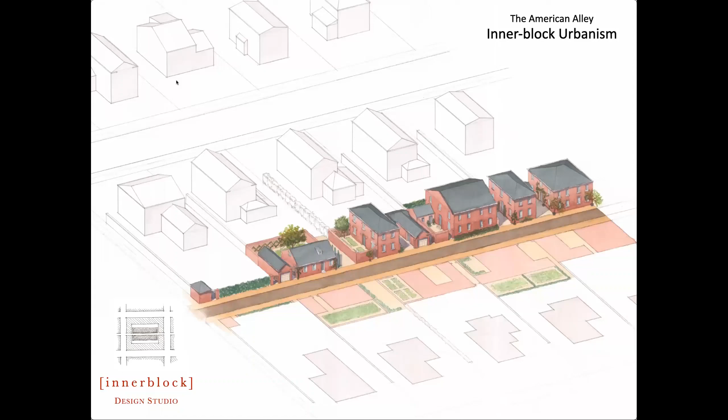Thank you, Steve. Good evening, it's a pleasure to be here with you all. Let me go ahead and share my screen. Looks perfect, can you see that? Yes, looks great. Okay, perfect.

So I'm going to give a brief introduction to this inner-block research and the focus on the alley. From 2015 to 2019, I was a grad student at Notre Dame studying architecture and urban design. For the 2018 academic year, I was offered a year of independent research by the school and given a travel fellowship by David M. Schwarz. I'm very grateful to both for making that possible.

I was studying primarily under Douglas Duany, and his focus on the inner block had resonated with me prior to studying at Notre Dame. I had worked as a timber framer in Philadelphia, and I didn't make it to the city, to downtown, that often, but when I did, it was these minor streets, these inner-block streets they called alleys, these residential alleys — but not alleys the way we probably think of them now — that really captivated me.

It was this twenty-foot distance from building face to building face on this narrow residential street, and then turning onto the main street, which might be sixty or seventy feet from building face to building face.

I'd always been fascinated by these interblock streets and spaces, and the school and fellowship made that research possible. Part of the impetus was the legalization of ADUs in California and Portland, spearheaded by people like Kol Peterson, sweeping across the country. I thought of traditional cities where ADUs would be built on alleys, and was reminded of the Philadelphia minor streets I love so much. So I spent that year traveling around England, the Netherlands, Belgium, and East Coast colonial cities, analyzing, photographing, and drawing these interblock spaces, trying to identify best practices that could inform ADU legislation moving forward.

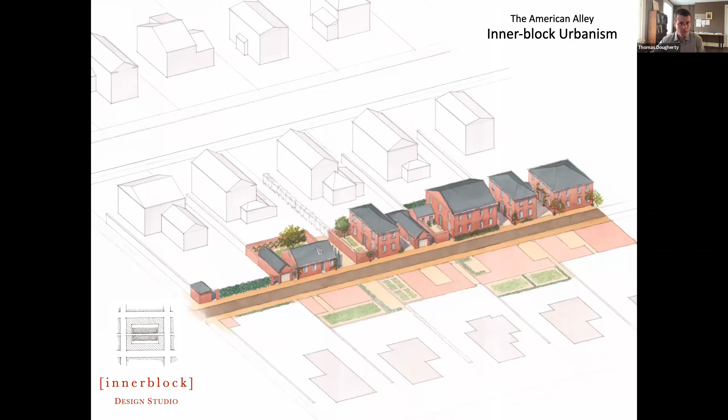I published a 4-part series with Strong Towns. We'd been working on it for a year, and it got published last month along with a bunch of analysis. So I'm actually not going to talk about that much tonight.

Instead I'm going to talk about the inner block specifically, and inner block urbanism, which I haven't actually spoken about directly before. It's always been the background of my research, through discussions with Douglas, but tonight's presentation will be purely on inner block, with a little bit of alley at the end.

If there's a theme to tonight, it's probably this quote from Douglas Duany, where he writes: 'Inside the city block, you find the intimacy of the hamlet, the quietness and sense of safety that can bring families with children into the city.' All this research is really a footnote—inner block urbanism, for me, consists of a series of footnotes to Douglas. I'm so grateful for all his mentorship while at Notre Dame.

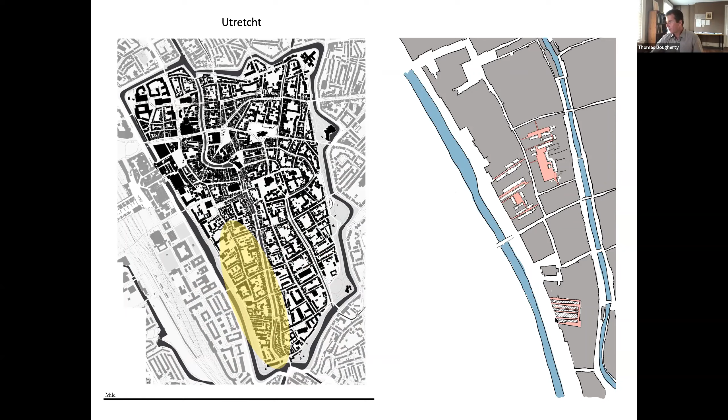I'll start here with the Seven Alleys. The Seven Alleys was built between 1842 and 1860 by the local Catholic parish as working-class affordable housing.

This is the main street here, with the canal on your left. This is where the old city walls were, and it's now a linear park. Here are the gable ends of those Seven Alleys—about 12 feet from building face to building face, according to my notes.

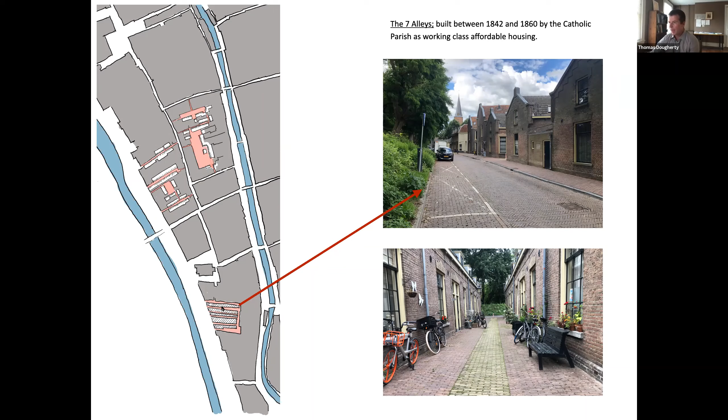You can see it's not a through street—this doesn't go through to the street over here. It actually loops around the back, with a series of passages you can take between them. This is looking down between the gable ends, which gives you a sense—on the far right there's a little bit of parking, but also shows it's not a through street; there's a building at the other end capping that street.

When you step back onto the main street and continue walking north, you see the linear park again, and we get into this little development in here. You walk down this—again, a 12-foot wide space, building face to building face. I'm going to call it inner block; we'll get into definitions a little later.

I'm also going to use the word 'nested.' It's inside of the block—it's not part of the main armature. You wouldn't necessarily know it's there; you have to be looking for it to some extent.

As you walk down this basically affordable housing street, note too that the fronts don't start at the main street—these all front the main street along here. It's only once you get past that 30 to 40-foot depth of building that you reach the minor streets, with buildings facing the minor street.

At this point you see a little lane, a narrow passage entrance—another characteristic of these inner block spaces: you enter them through narrow passages. That gets you into a shared garden courtyard. So I've just walked through this passage, and now I'm in this courtyard right here—again, nested, completely inside of the block.

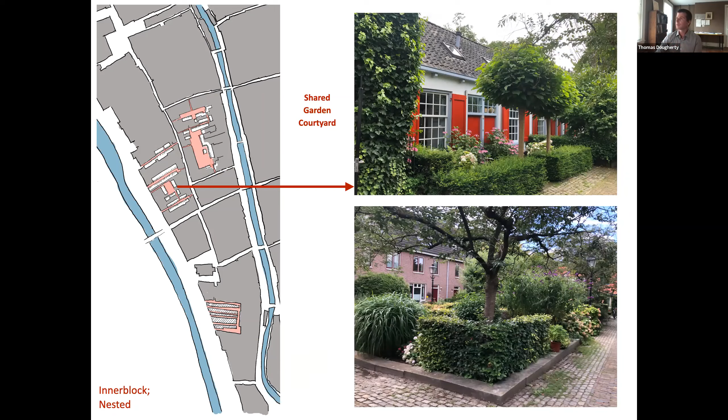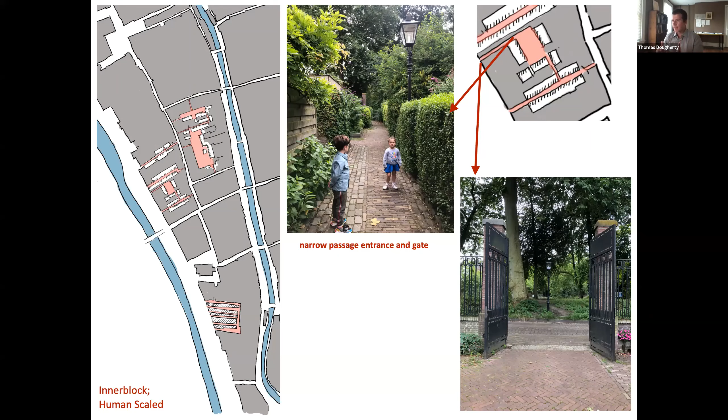And now I'm leaving it. This is the pathway back to the main street here. And this is the gateway. So again: gateway, passage, nested. These are some of the characteristics of inner block and human scaled design.

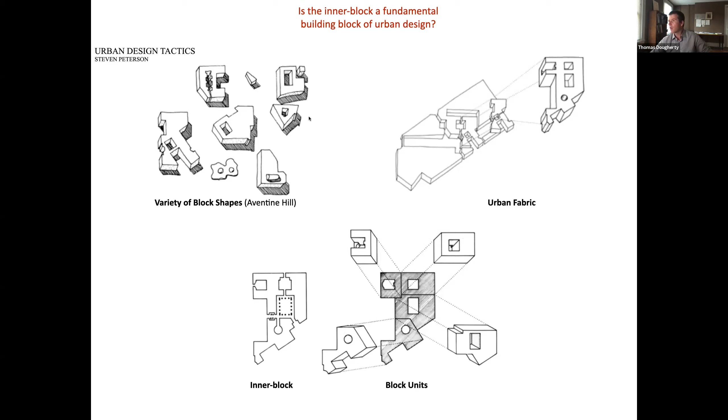This is Steven Peterson's diagrams from Space and Anti-Space, and he's looking at Rome—this is the Aventine Hill. So he starts with a variety of block shapes, and those block shapes start to make sense as they form the urban fabric. But those blocks, the underlying framework or component of the block shape, is the block unit. And the block unit only makes sense when you understand the inner block. So all the variety of block shapes are given form by the inner block courtyard, which then leads to the block units forming a block, and then the urban fabric itself.

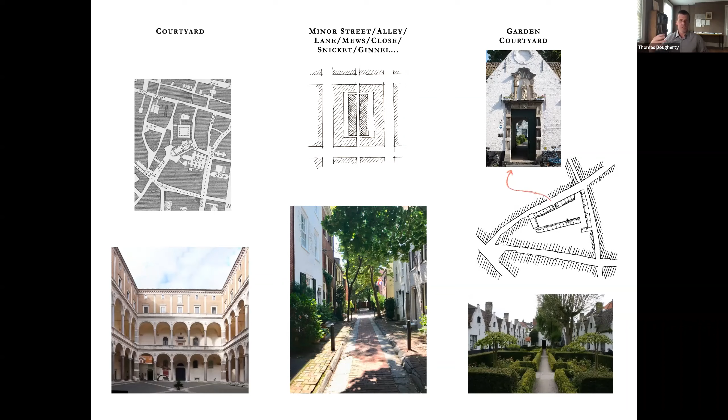Well, that breaks down—not that Stephen Peterson meant it necessarily carried over—but it doesn't really carry over to these minor streets or alleys in Philadelphia, or the garden courtyards of Bruges. So this is a figure ground of a minor street in Philadelphia. Note, like Utrecht, when you walk down it, you're actually walking down the sides of buildings until you get, whatever it is, 45, 50 feet in, and that's when the minor street starts to be shaped by these trinity party wall townhouses here. Or the garden courtyard here, clearly a shared garden courtyard. In some sense I see Steven Peterson's argument, but it's not really defining a block component—there's not a regularity; this courtyard itself is shaped by the irregularity of this organic block.

And this is a really important point. This history is told very well by this book, North Atlantic Cities, that was just recently published by Charles Duff. And this is a quote from Witold Rybczynski, which I'm going to read.

The smallest unit of American urban development was the individual house rather than the palazzo or courtyard apartment. This continued the building tradition of the English and the Dutch, which faced the street with the entrance to the house, as opposed to an entrance off a courtyard. This prompted the development of the quiet, semi-private residential street, where some of the privacy of the courtyard was created.

And I think that's such an important thing to keep in mind when you study the urbanism of Mediterranean Europe, or of Paris or Vienna or these other cities which are composed of palazzos and courtyard apartments. There's a lot to be learned from that, but the American street can only really be understood when you understand the Dutch and English tradition, which we inherited, with that front door which opens directly onto the street.

So this is a minor street in Philadelphia, and you can see aspects of that courtyard — this transitional, necessary and important transitional space, this quietness of the street — characteristics of the courtyard here on either side. So rather than the palazzo courtyard, this element is now ending up on the minor streets here.

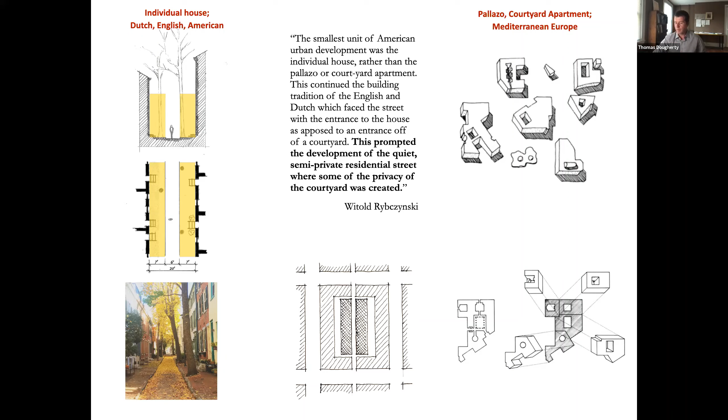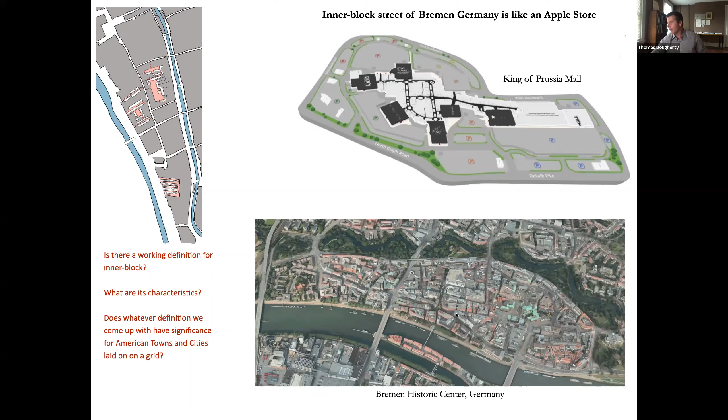So looking at the King of Prussia Mall, we can see, okay, where are the anchor stores and where is the fabric in between. And you can see some similarities — here's the anchor site, and here's the historic center of Bremen.

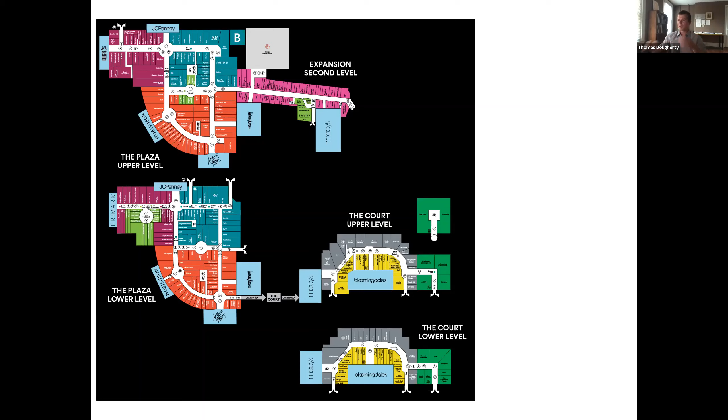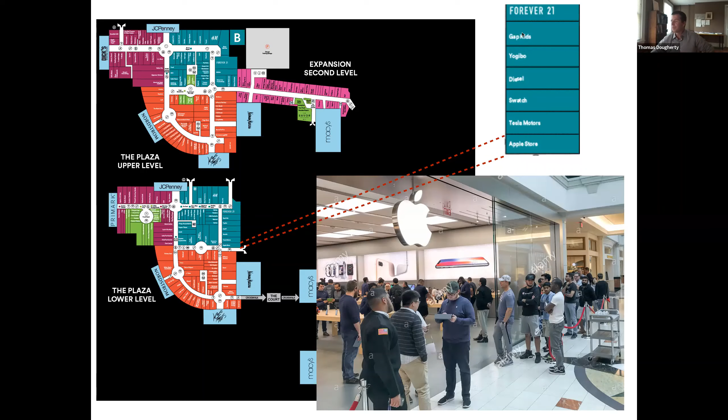The layout is clear to architects and urban designers. You'd want to pace this out and see how the people laying out these malls actually knew a whole lot about people's attention span and getting from store to store. What they didn't know when they laid this out was that the Apple Store was coming later on, the iPhone was coming. So the true anchor store, one of the most significant anchor stores, actually has less real estate than Gap Kids here.

So Bremen, Germany — zooming back out as an urban designer, you can see where the historic center is, you can see where tourists want to go. And I don't use that disparagingly.

I think, what's the measure of the greatness of architecture? It's the places that move us the most, move people the most. So if this is the popular place to go, if this is the tourist place to go, let's pay attention — what do people love about that?

So obviously this is the historic center. You can see the old walls, you can see the organic form. Probably this at one point was historic — I'm sure that was important. The three bridges are probably three historic points, even if they're modern bridges today. This, I'm assuming, is post-war development, or at least largely that.

So here's the figure ground of Bremen. Again, as designers, we can kind of look — this is all modern, this looks blown out. These streets actually don't look so great either. It looks like this might have been hurt during the war, I don't know, but I wouldn't be surprised if it was bombed.

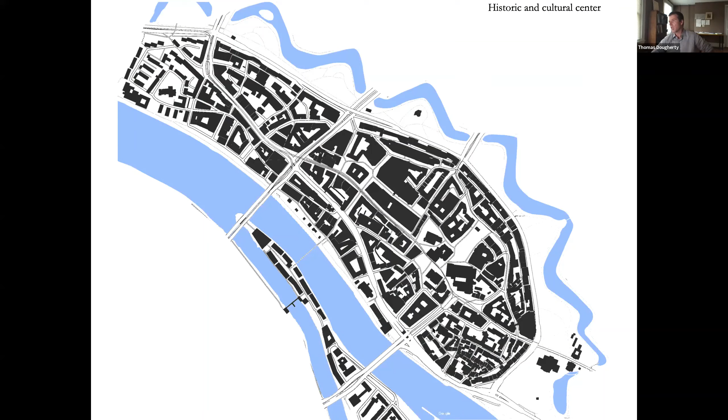But you can kind of see down here, okay, this looks like the heart of it. It would make sense given this shape here. And yes, these are the main market hall, the main cathedral, the market — I guess this is Marktplatz and town hall probably.

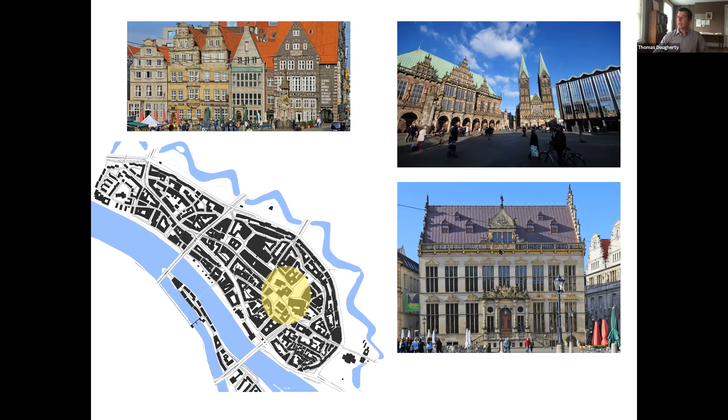But that's not actually why I picked Bremen or started looking at Bremen a while ago. I was following European travel posts on social media — Instagram things that would travel around Europe and post beautiful pictures — and I kept seeing Bremen come up. So I assumed that Bremen, like Bruges, had these medieval streets that had somehow been preserved, and it was going to be a beautiful place to go visit to study minor streets.

And then I started noting that all the pictures were showing the same building. So these are the top pictures — if you just search Bremen on Instagram, in the top 10 pictures, 3 of these are showing the same building. And I'm pretty sure this space is this space in reverse.

So that's when I started looking into Bremen and realized that the anchor store, the anchor urbanism, what brings people to Bremen is this tiny little fragment of medieval urbanism—this medieval street, originally a fisherman's street, right next to the water. The name has something to do with fishermen's houses along it. I wrote 'quarter' here, but it's just a street, composed of 111 historic buildings, the last medieval fragment of Bremen, Germany, and also the most popular tourist attraction in Bremen, the 11th largest city in Germany.

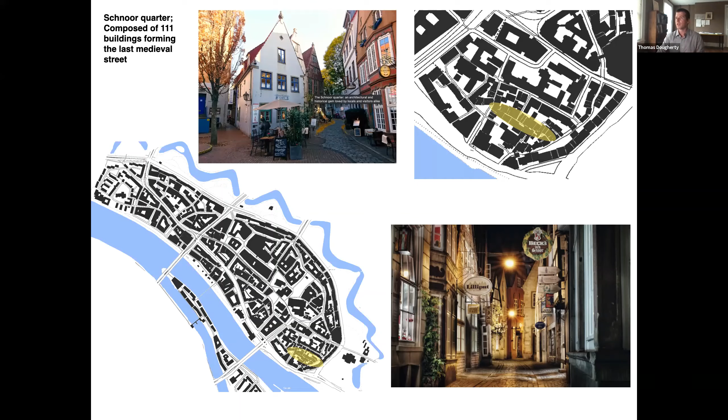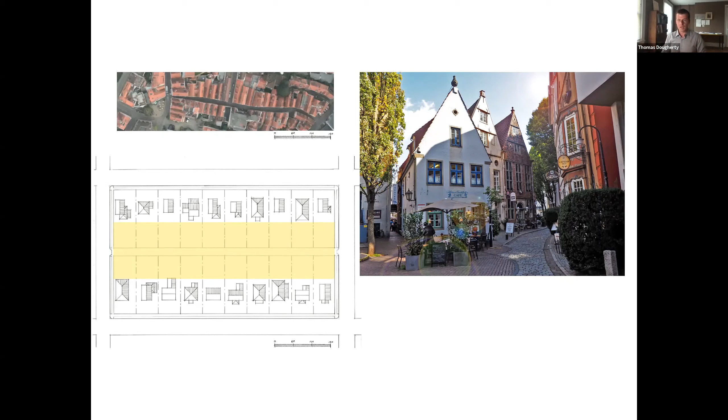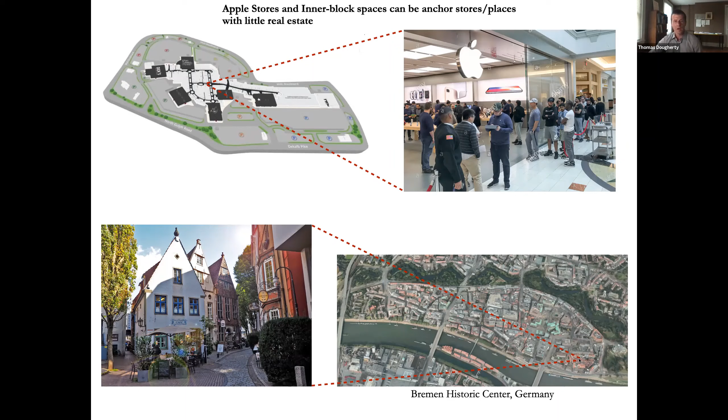And this right here, this kind of Apple Store anchor of Bremen could be built by Clay Chapman or Austin Tunnell in their sleep. So how are Apple stores and innerblock space related? Apple stores and innerblock spaces can be anchor stores or places with very little real estate. Here you can see Apple, in this kind of little forgotten corner smaller than the Gap Kids store, is one of the true anchor stores of King of Prussia Mall. And same with this little fragment of medieval urbanism here.

So I'm calling it innerblock, but why am I calling it innerblock? Maybe we should be calling this many blocks. Is this a block? You could argue maybe. If we just accept that as a street, then here's a block, here's a block.

This is a quote from Leon Krier: 'My main affirmation as regards urban design would be urban blocks should be as small in length and width as typologically viable. They should form as many well-defined streets and squares as possible in the form of a multi-directional horizontal pattern of urban spaces.' So, make small blocks.

But I think if we only understand it as small blocks, we're going to lose some of the characteristics of innerblock, which I'm going to argue this street has. We really need to understand it more as this nested place, this inner block place.

So what allows this street to be the anchor urban place of Bremen? I would say here are some characteristics: innerblock urbanism is nested, and it's off the main armature, and it really could be anywhere, because it's such a formed place, it's not reliant on the rest of the town.

When you're on this street, when you can bring that scale down, this really could be inside of my residential block of my hometown. And because of that, it has this capacity to give us a formed urban realm at a human scale, which is not found anywhere else in these small blocks.

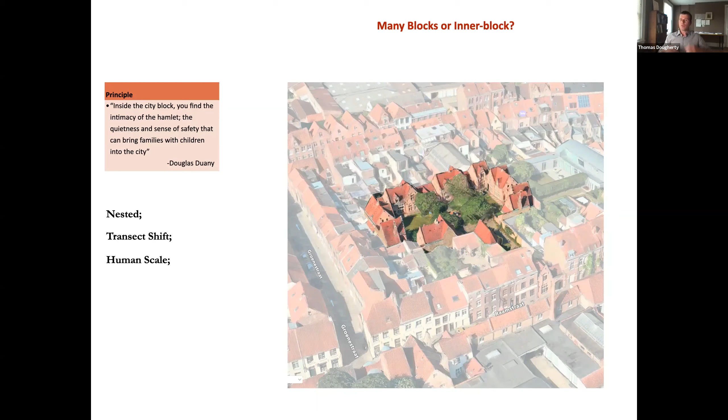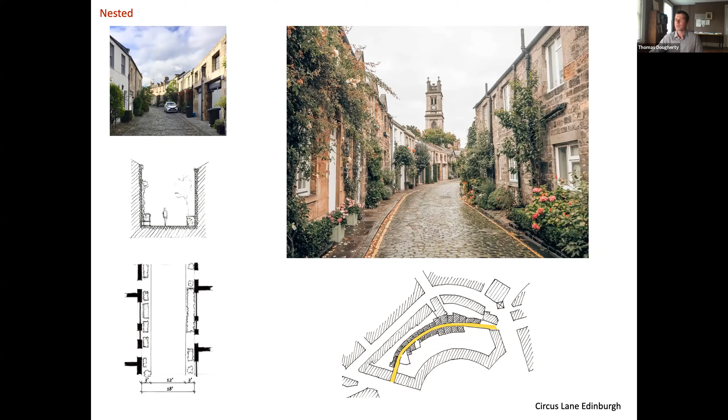So nested, I wanted to show this image of Circus Lane, another innerblock street. I think it becomes clear that it's not 2 blocks, right? This width, it's all context. If the whole city of Edinburgh, this is New Town, Edinburgh, were these minor medieval street-scaled places, I wouldn't say it was nested necessarily. But the context of Circus Lane, next to all these very wide streets and the park, makes it clear that it's nested inside of this. This is not 2 blocks, but 1 block. And this series of images shows that.

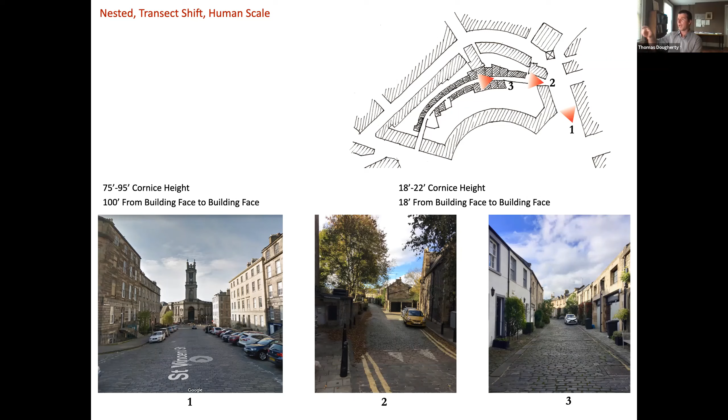Here's the first one, I'm standing here. You can see it's 75 to 95 feet cornice height of these main city buildings, and 100 feet from building face to building face. Then I get to about right there, this is image number 2, and I turn to the left. It's almost startling when you look down and see this other world so close to this New Town, Edinburgh, Enlightenment city planning world. And here is a village. You take another 20-second walk down the street, and you're now at 18 to 22 foot cornice height and 18 feet from building face to building face.

So, nested urbanism and defining place. There's a famous saying: there are 3 things that matter in property, location, location, location. One aspect of location, or our experience of location, is that if I remember a place for its locale, if it's memorable, period, there has to be a sense of place. This is from the lexicon: a highly desirable but elusive attribute of urbanism. Its existence is notoriously unpredictable in conventional suburban design, but common in traditional urban fabric.

This is Peruvian Ave and Worth Ave in Palm Beach, Florida. It's the most expensive, most valuable retail real estate in Palm Beach. And it doesn't, where is that? That's not it, right? It's right there. There's that location.

This is Via Mizner, built in 1923 by the architect Addison Mizner. And we start to see those attributes again, right? It's nested inside the block. There's a clear transect shift where you go from the context, to inside the block, right there, here. Look at that sense of place. Look at that human scale. Human scale spaces like these define a place, even if they account for a very little part of the overall square footage or cost.

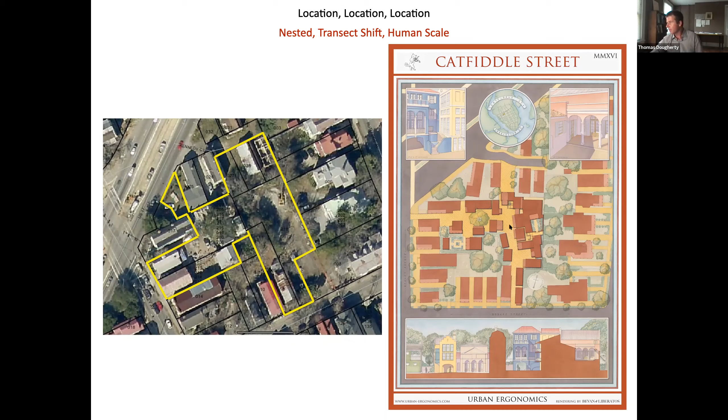Here's a modern example. Witold just wrote his new book, Charleston Fancy, on this development. This is urban ergonomics in Charleston. This is an innerblock space, leftover space, that only incremental developers could love or ever want. And yet, look at what they've done with a handful of buildings. They've started to define this lane that goes around here. These are the kind of formed urban spaces they were able to create. Look at the human scale they've gotten down to right here.

The details on this archway, the lack of curbs, the nested, transect-shift human scale they've achieved here, and this is the context, right? This is the ever-present American street context. Not even to diminish it, I might argue that Catfiddle Street can't even really operate publicly. If it were all Catfiddle streets, we couldn't get our modern infrastructure in there, maybe. But because we have this American street as its neighbor, we can develop this innerblock Catfiddle Street right next to it.

Opticos Design did something similar in Daybreak Mews in Utah.

Is this two blocks or is this eight blocks? I think when we start to think about those characteristics, that nested sense, that transect shift, that human scale they've been able to create here, it's valuable to call it innerblock. It's valuable to recognize this space is carved out from inside the block. Here's another alley which services all of these.

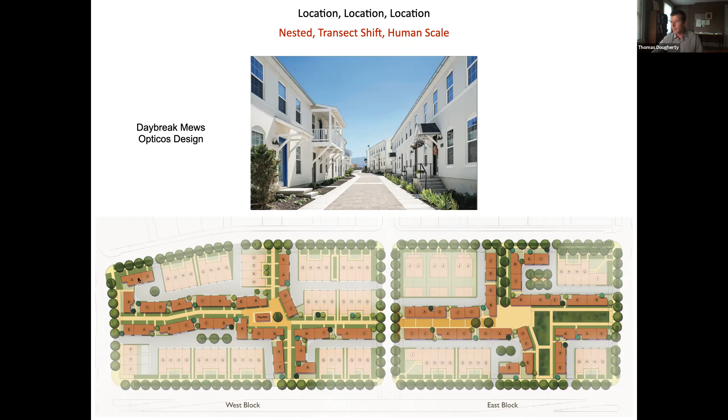At a presentation Dan gave of this, I remember him saying the developer was nervous about this design move. But in the end, they're calling them Mews houses, and they ended up selling more quickly than the outer houses. These were more desirable, definitely per square foot, than the rest of the development.

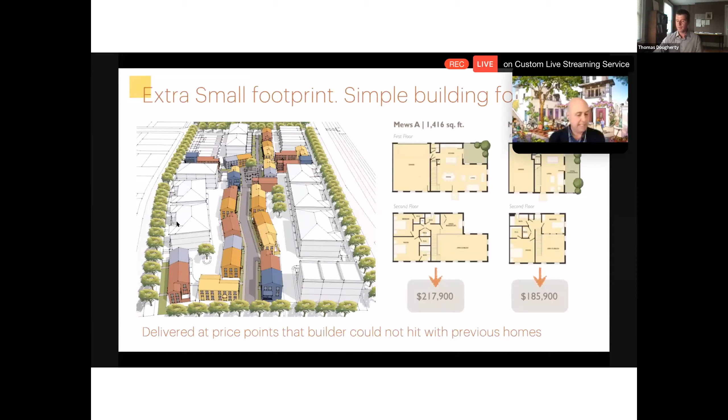And the pocket neighborhoods, Ross Chapin, and the others—this is another example of building inside the block of modern residential development, designing and forming both sides, all sides of the development, and because of that, being able to create this sense of place, which is so key to that sense of location.

I don't know what the rest of the land values are right here, but I could imagine them being quite low. But as a developer, if you can develop your own location, if you can create your own location, in some sense you can create your own land values. And interblock gives you an opportunity to do that.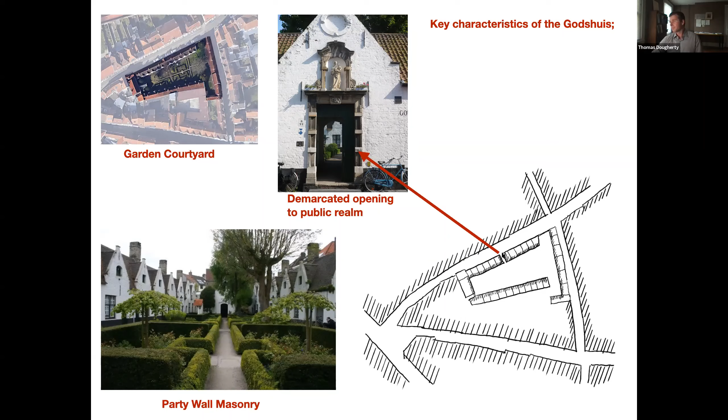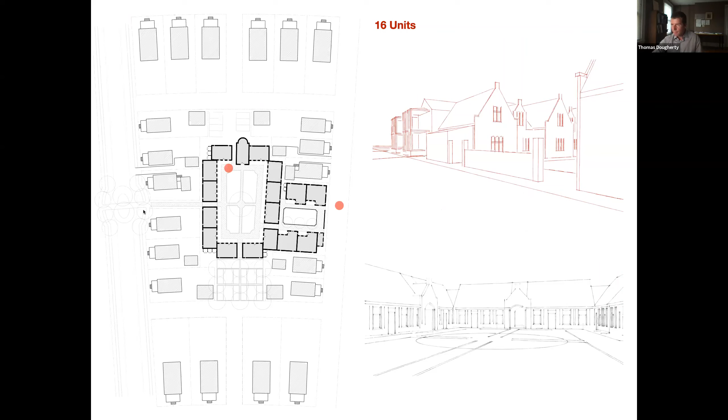And so we have 16 units. This is inside of a residential block to be built. We have one opening here so we can control how one enters, and then we'll have walls on either side of this lane, controlling that space as we move through the block from left to right. And some of the inspiration for the courtyard there, and how it nestles inside of the block.

At the risk of derailing this presentation, I'm going to briefly touch on some research I did with Douglas back in 2019 on settlement types in Britain, the transect, and the scale of the neighborhood unit—refining the transect via study of settlement types, nesting, settlement components being nested one inside of another, and the human scale that's evident in pre-industrial villages, towns, and cities.

The thesis of this is that pre-industrial settlement types had patterns of scale—hamlet, village, town, city—and that those settlements are composed of discrete wholes. You can think of the Pantheon with its temple, its triumphal arch, its tholos, all coming together to make up the Pantheon as a composition. We can't understand these villages, towns, and cities without understanding the components that made those places up and how those get reinterpreted and nested one inside of another.

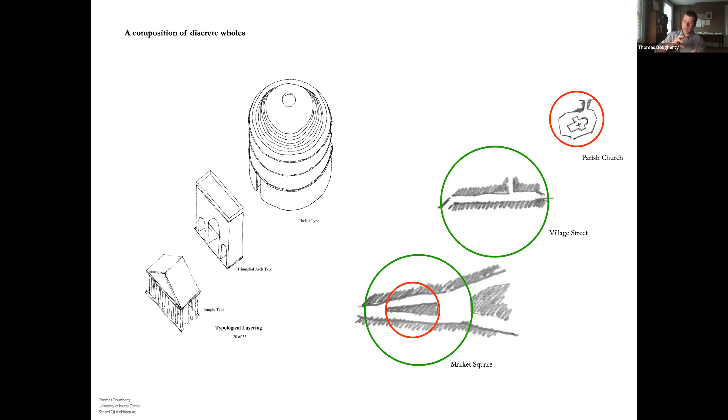So very briefly, I'm going to go through a bit of that research I did with Douglas. This is the English village—made up of a series of components. This is a furlong, 660 feet, so this is the diameter, and then the radius is an eighth of a mile, which is significant when you think about the neighborhood unit and some other things.

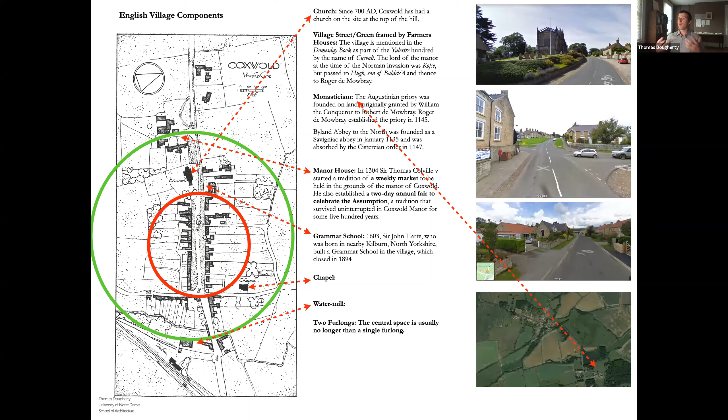You can see the center of that pre-industrial traditional village is the village green, the church on one side, another street going off here. It's an agricultural settlement type unit, and there is almost no economy to it at this point.

But some of those villages became market towns. You see the original village green—let's say that was the village green—now that's a market square, and the village green extended, maybe developed and extended down. This little spina, this spine, is what happens when the market halls, these tents, become a little more stable. They start out as tents, let's say, and you slowly develop this little string of market.

You'll see that in many traditional historic centers, in the market plots, there are market buildings that were later developed. These are components of the market town. These are English settlement types—not claiming to have studied all of them—where we have the market square, market street, the guild hall, and the spine of market buildings.

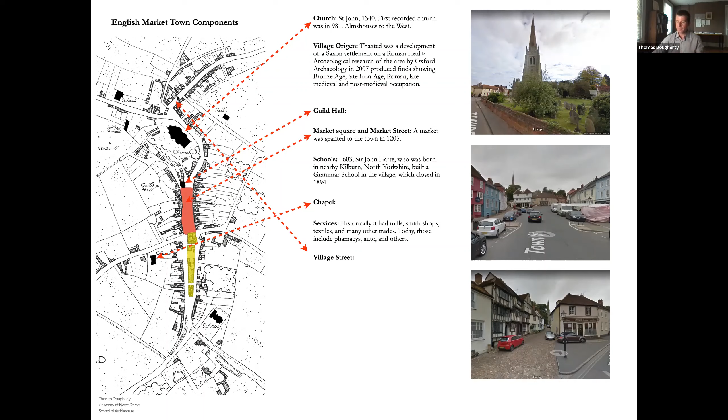We now have a couple of chapels, a school, and the village street has come back, right? The residential street has come back and is now developed up here. That sometimes became a city, and you can see these same components, where the market square of the city is a little bit more refined—probably 4 stories as opposed to 3, or 3 as opposed to 2—but it's still a component of the market town. The city is developed out.

There are many more of these village streets around here, and some other components found inside, like the hamlet. We can now find little nested hamlets. I can't necessarily point one out on this figure ground, but I'm sure there are little developments inside these blocks.

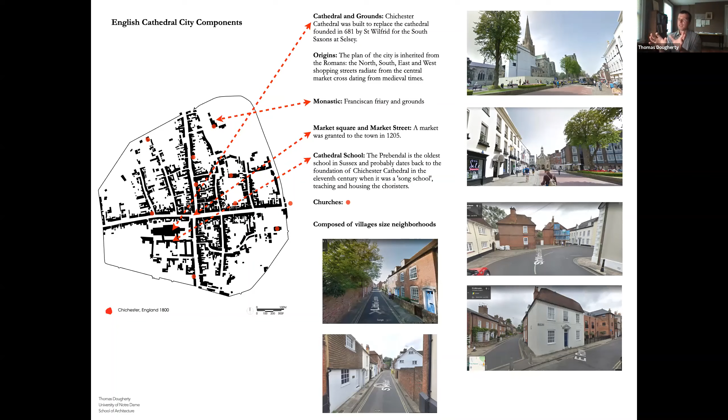These are the scales we talked about. The hamlet is the furlong, 660 diameter. The village has two of those. That usually comes with the village street, and the village is a street, buildings on either side of a village green. The market town is fairly linear usually, but now we're at that quarter-mile radius, which we remember from Clarence Perry and the neighborhood unit and the Transect, and how that's been used over and over. Cathedral City is also pretty much within that framework as well.

What it's reflecting is obviously economics and the pedestrian. If there's no economics other than agriculture, the village can only build so far. When you get the economics of the market town, you can build some more. When you become a cathedral city, obviously there's even more.

This is a quote from Lewis Mumford, and this is a critique in some sense of the neighborhood unit: 'In a rudimentary form, neighborhoods exist as a fact of nature, whether or not we recognize them or provide for their particular functions. For neighbors are people who simply live near one another. To share the same place is perhaps the most primitive of social bonds, and to be within view of one's neighbors is the simplest form of association.'

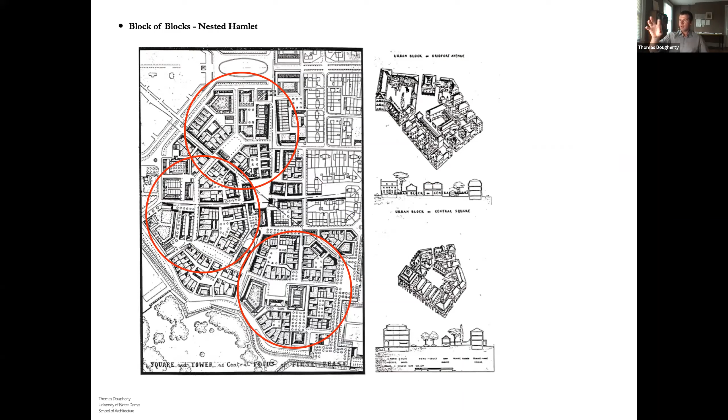So this is Poundbury, Leon Krier's Poundbury. These circles—I'll use the same color—this is 660, a furlong. Here we have the nested hamlet, nested hamlet, nested hamlet. You can see the way he's building his blocks, his block components, and the scale he's using. Here is that village dimension we talked about.

This is the furlong radius from here to here, an eighth of a mile. And this is Poundbury as a whole. You can see this little section right here, which Leon calls a quarter—this is that village scale, village streets here, here, here, here—and then that neighborhood scale we talk about here, here; that's all of Poundbury.

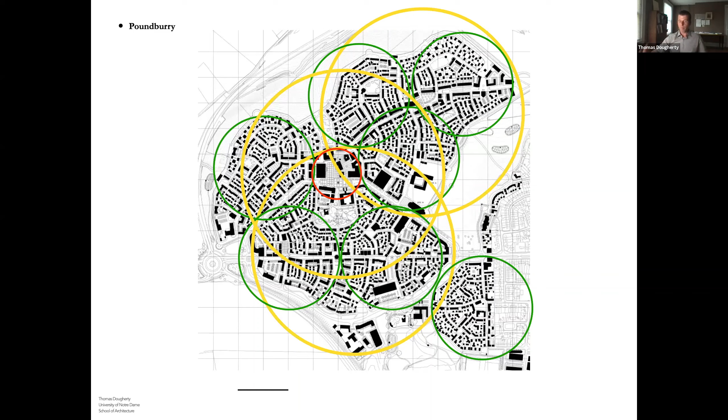And so the transect—is this a gradient of characteristics? I'm attributing this to Andres, but I'm pretty sure it also shows up in the lexicon: the six habitats vary by level and intensity of their physical and social character. Is this just levels of intensity, or is the neighborhood, the city, the quarter composed of discrete wholes, as we see here?

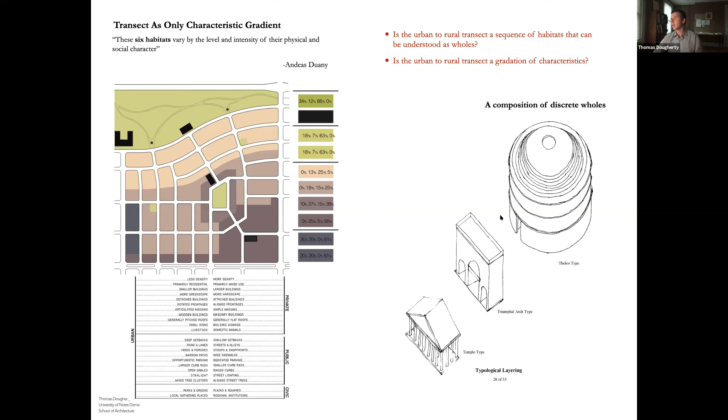Again, our diagrams of the transect lead me, and I think others, to think of the transect as this gradation—a delineation of characteristics, not described as discrete wholes.

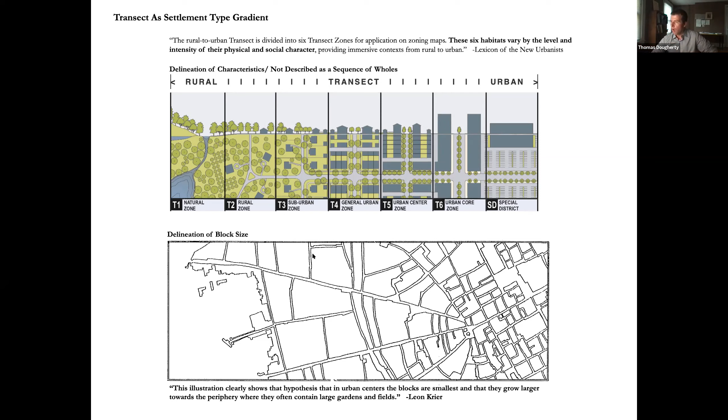Whereas this diagram on the bottom is a delineation of block size from Leon. He says this illustration clearly shows the hypothesis that in urban centers the blocks are smallest and that they grow larger towards the periphery, where they often contain large gardens and fields. Of course, those large gardens and fields would be inner block out here, but you maintain this urban form throughout. All of these blocks are riddled with inner block spaces, inner block village streets.

So to get back to that question: is there a working definition for inner block? What are its characteristics? And how does that inform American towns and cities laid out on a grid? I want to go back to the Dutch and English tradition of nested urbanism here. I guess I would answer the first two questions. Is there a working definition for inner block? Well, probably its characteristics—that's the only definition I can really come up with.

And those characteristics are definitive of the Dutch and English tradition. So again, the theme is: inside the city block you find the intimacy of the hamlet, the quietness and sense of safety that can bring families with children into the city.

Bruges, Philadelphia—Philadelphia's urban form of these inner blocks really is inherited directly from London, in the rebuilding of London after the Great Fire in 1666.

And those characteristics then are: nested, it's inside the block, it's off the main armature. There's that transect shift where typically you go from city to town, town to village—you go down. But as the Charleston example gave us, you leave the American street context to go into something much more defined and city-like, so the transect shift could go the other way as well. And also that human scale that you find inside of the block.

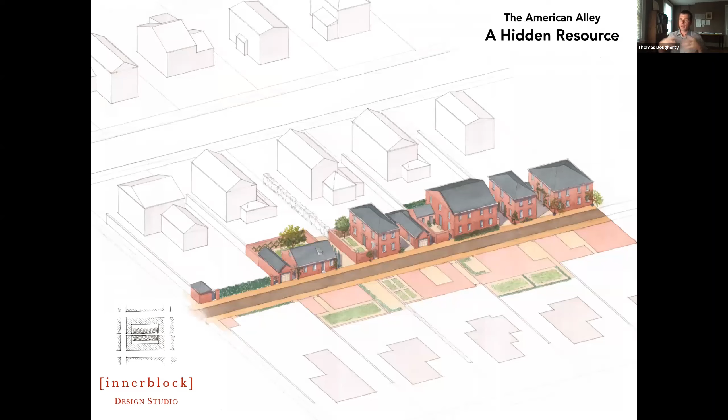And the last question: does this definition, what significance does it have for American towns and cities? I'm going to answer with some information on the American Alley and some of the stuff I published with Strong Towns recently.

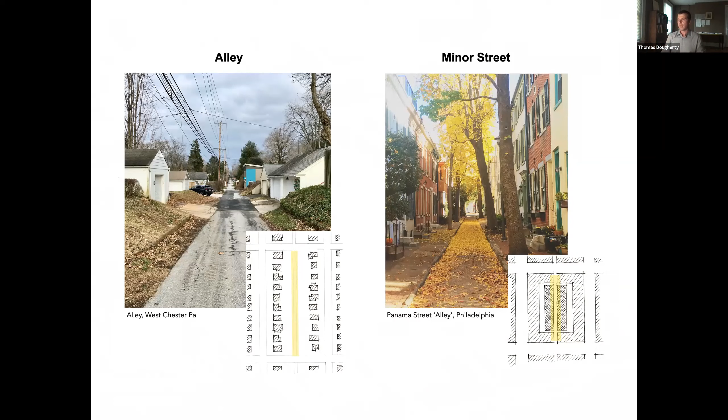So I'm going to talk about two different urban types: alley and minor street. These two blocks are drawn at the same scale. It's remarkable to see this very highly urban form, this Panama Street or alley in Philadelphia, at the same scale as the alley in West Chester, PA, and think about the potential of one and the other.

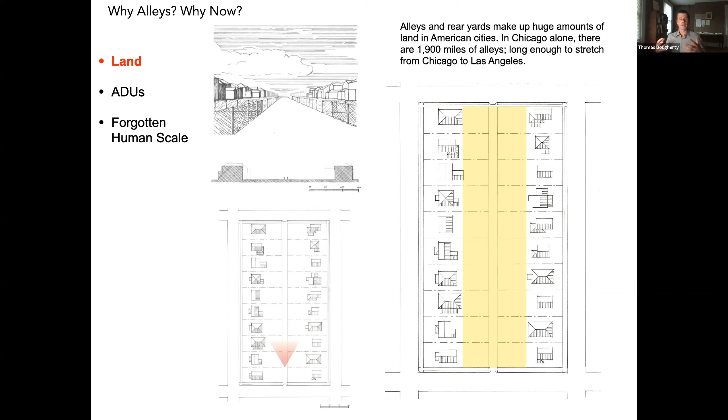So why alleys, why now? Well, one reason is land. Alleys and rear yards make up huge amounts of land in American cities. In Chicago alone, there are 1,900 miles of alleys—that's long enough to stretch from Chicago to Los Angeles. So there's a vast amount of real estate sitting inside American cities today, traditional American cities.

The second reason is ADUs, and the new ADU legislation sweeping across the country, which is really allowing for development along alleys for the first time in a century. And the final one: that forgotten human scale. I'd argue there's a human scale that has really been forgotten in America, and for almost all cities and towns in America it really never existed—but we can find it in the alley. We can find the remnants of it, that 20 foot from building face to building face, or just from outside to outside of the alley.

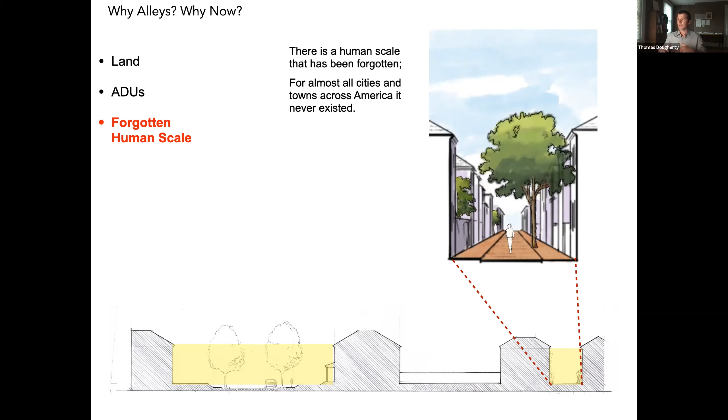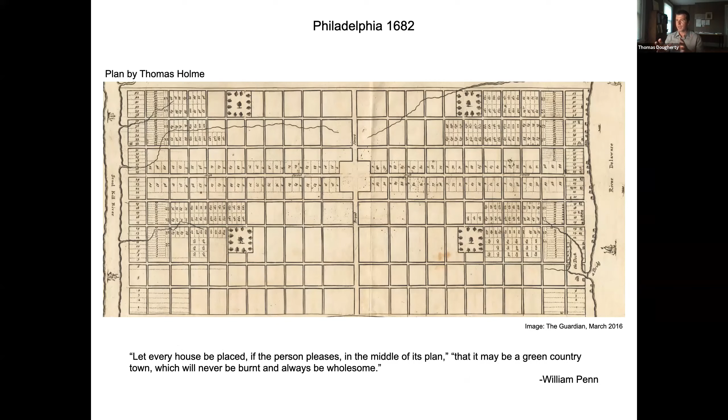So already at the beginning, you have the founder suggesting pulling your buildings away from the street—reducing any kind of urban form you might have, and also not dense at all.

But that's not actually how Philadelphia developed. In Philadelphia in 1702, just a handful of years later, you see it developed along the wharf, because that was the economic hub. All of these red streets here are unplanned minor streets developed by incremental developers. Our definition here is a pedestrian-scaled, inner block, nested street formed by buildings and walls which front the street.

So these are the planned streets on the left, and on the right you have the unplanned streets, and more unplanned minor streets of Philadelphia.

And this is a typical 400 by 400 Philadelphia block. You can see how it's been split up. We get this question of, is this one block? Is this four blocks? But if you think about that human scale, that transect shift, that sense of being nested, I'd like to argue that this is inner block, and there's value to calling it that.

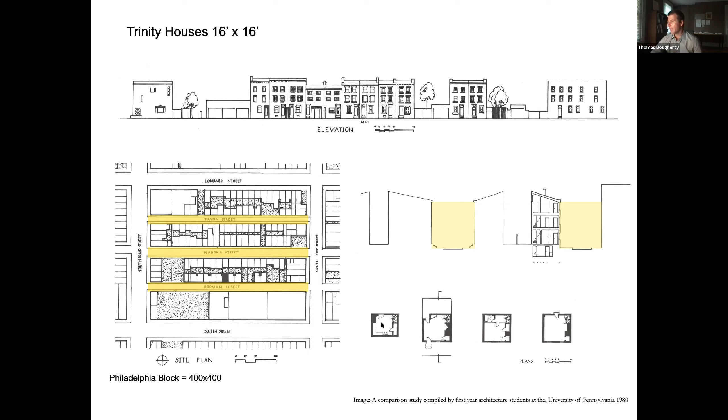These are narrow minor streets formed by Trinity houses. These are three-story little party wall row houses all along them.

Between 1840 and 1850, the population of Philadelphia grew by 60%. Much of that growth happened inside of the block, and social activists at the time started to take note of the poverty and unsanitary conditions found there. In 1904, Emily Dinwiddie wrote, 'I thought Philadelphia had no bad conditions, that it was a city of homes, yet the intricate network of courts and alleys with which the interior of the blocks are covered is a conspicuous feature.'

At about 1900, they stopped developing alleys. It started to become illegal, both from a building code point of view and from a zoning point of view, both in Philadelphia and around all of the East Coast. I'm talking about these minor streets in Philly, but it was something that was prevalent in Boston and Baltimore and many other cities.

So the history of the service alley in America is different. For that, you really have to go back to London and the Great Fire of London. My definition right now is: the American service alley is a common right-of-way that borders the backs of urban property lots. Alleys are traditionally the home of services such as trash collection for the buildings that front the major street, and are by their nature backs, not fronts.

This is Grosvenor Square in 1721. You can see the mews running down the center of these, and these are really lined by carriage houses. These are interblock streets, service streets, specifically built for carriage houses.

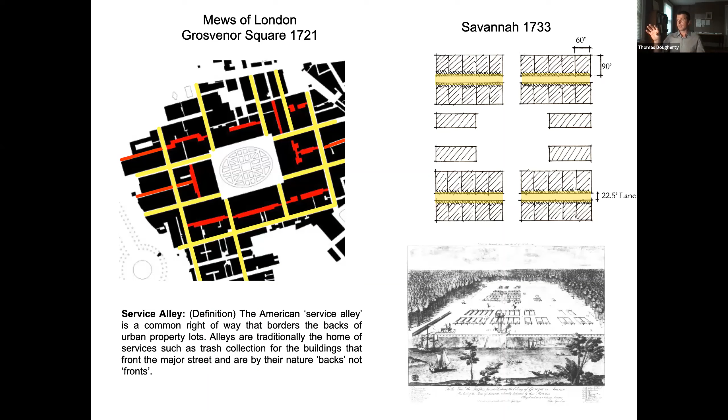The same people developing west of London after the Great Fire are also developing in the New World. So you have those same speculators having Oglethorpe lay out Savannah in 1733. And when he does so, he brings the mews, or at that point what it was called the lane, to Savannah. That's the first time we get the service alley in the United States.

So for about 100 years, the service alley stays in Georgia, in the Georgia colony, and doesn't make its way out. But by about 1800, 1810, 1820, people are crossing the Ohio River. The continental grid is the basis for now platting all of these Midwest towns, and Chicago sets the stage for developing with alleys.

When Chicago is laid out in 1830, it has 58 blocks. The streets are 66 foot wide, and each block has an alley that's 16 foot wide. At that time, they're no longer service carriage streets for the wealthy—these are now the service streets for the industrial city. So coal delivery, latrines with night soil removal, water wells, kitchens, stables. This is the service alley that, if you have one in your hometown, that's its history.

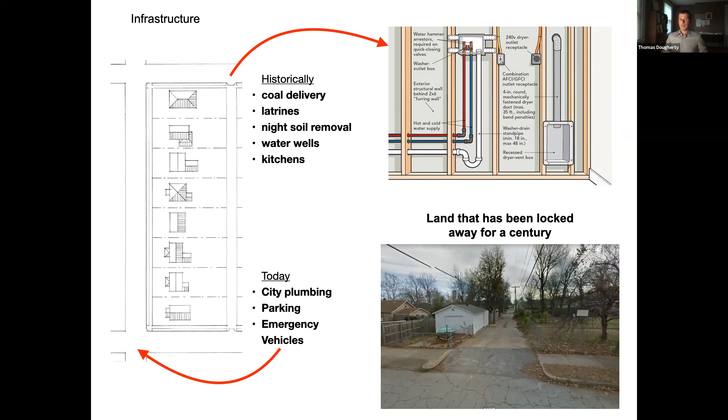So now the infrastructure which was the impetus for the alley—if you have one in your town: coal delivery, latrines, night soil removal, water wells, kitchens—this fits within your cavity wall. And today that infrastructure, city plumbing, on-street parking, emergency vehicles, those are primarily on the main street. In many cities across the country, alleys are being deplatted or simply abandoned, not kept up. It is a hidden resource that is not being utilized at all, and we need to recognize that before it gets deplatted.

So let's build ADUs along alleys. The vision is the Utrecht Street, but the reality is some of these ADUs going up today. So I'm going to lay out quickly some guidelines for what homeowners can do to try to capture some of these characteristics.

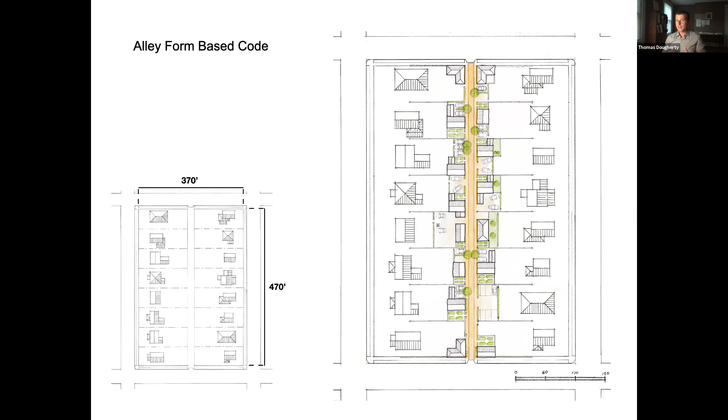Of urban interblock development. The first one I would recommend is an alley form-based code, which could go hand in hand with new ADU legislation. When you legalize ADUs, they're built in such a manner as to form that minor street, to create that 20-foot wide street similar to what we saw in Utrecht, even at a much lower density, if you're incorporating components like street walls and other things, you'll be able to form that space.

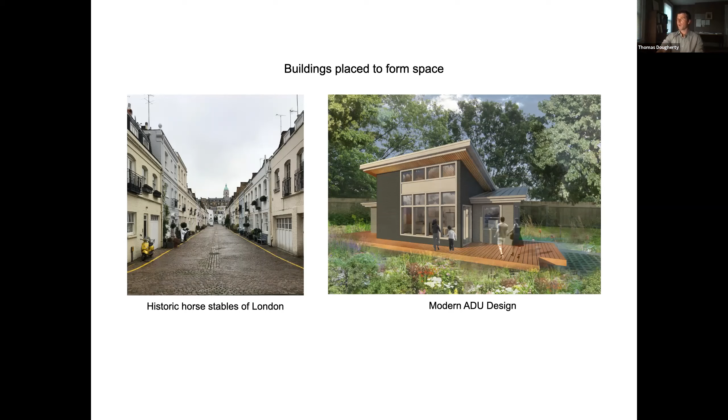And our modern ADUs don't even have a sensibility to form space. They're designed to be anywhere. This is an advertisement for one on the right. So buildings need to be placed to form that space.

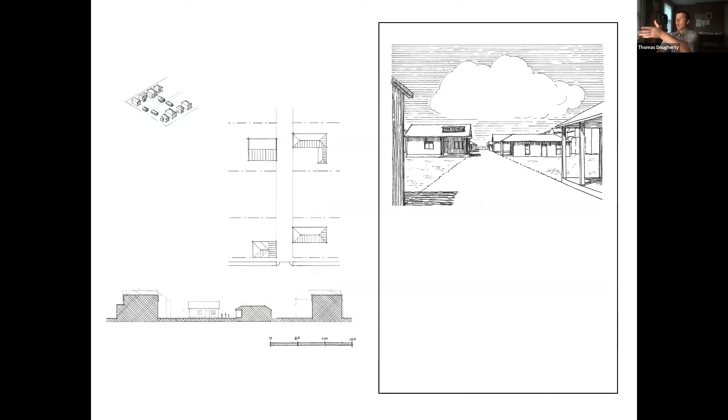But unless everybody on your block is going to build an ADU, we need other tools in our toolkit. On the right, you can see the perspective—it's still not a formed space.

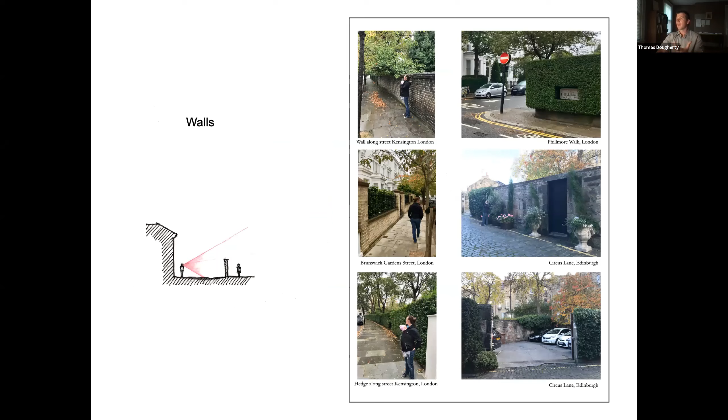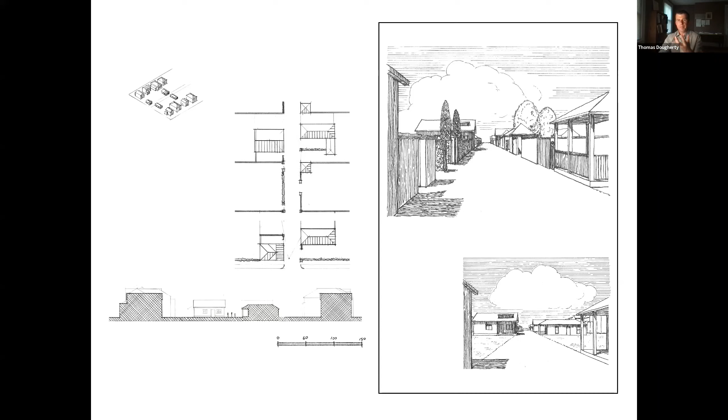So we can bring into play walls. Walls are common throughout the interblock spaces of England and the Netherlands. So just adding the walls—this was our space, this is our space with walls and trees, an outbuilding. And you start to get that sense of spatial enclosure that defines space, which is so key to defining location. And here we've also created that human scale.

So as ADU legislation unlocks real estate along alleys for the first time in a century, it's time that we recognize the potential for spatially formed, human-scaled, beautiful and prosperous urban places already lies within every urban block.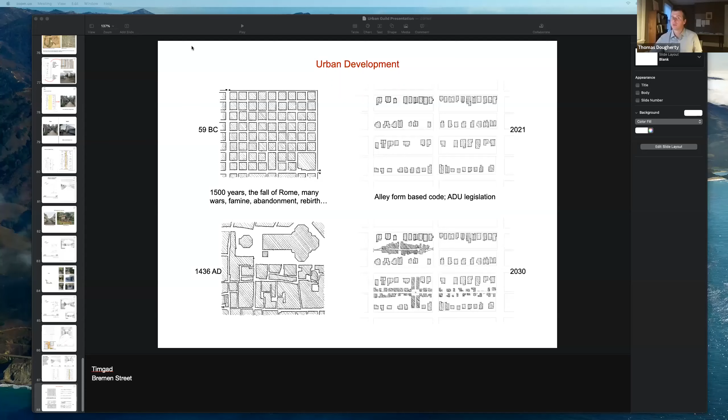And I actually want to just comment on one of those things with this. Can you see? No, you can't see my screen quite yet. I'm going back to this image, right? What are you seeing? Are you seeing my screen? Yes. Okay, that concept of interest, that concept of alteration, you started with the Transect Shift.

That's a great point. One of the things I want to say as well is that the inner block gives us, which I mentioned with that Charleston one, is that, like you said, you can't build like this. An argument could be made that we shouldn't be looking at medieval urbanism, that we shouldn't be looking at these traditional cities because they're not reflecting the needs of the present day. One of the beauties of turning our urbanism inside out, turning our existing cities inside out. This is our city. I actually live in a dense town, relatively dense town.

Look at, obviously, I had to draw in faintly the curb cuts just so it could make sense. We have the ability to build medieval urbanism, which, yes, is currently illegal, but could be serviced. You could have a trash container somewhere around here. You could service this beautiful nested place, which I could be in Bremen walking down it, or I could be in my backyard. As far as the experience of locale, I'm only reliant on either side of that street because I brought that scale down.

And as you talked about management and development, that's a great point. I didn't bring up, obviously, different ways of how do we tackle the inner block. I showed residential blocks, but it could be any number. This would have to be some sort of fee simple splitting the block in half, which I know the Atlanta group, Atlanta ADU, is working on, fee simple splitting off the backs. But this could be some combination of buying up four lots here, developing a little street here, ADUs along here, or simply ADUs along here, developed in such a way as to take advantage of that nested space for that transect shift. But thank you.